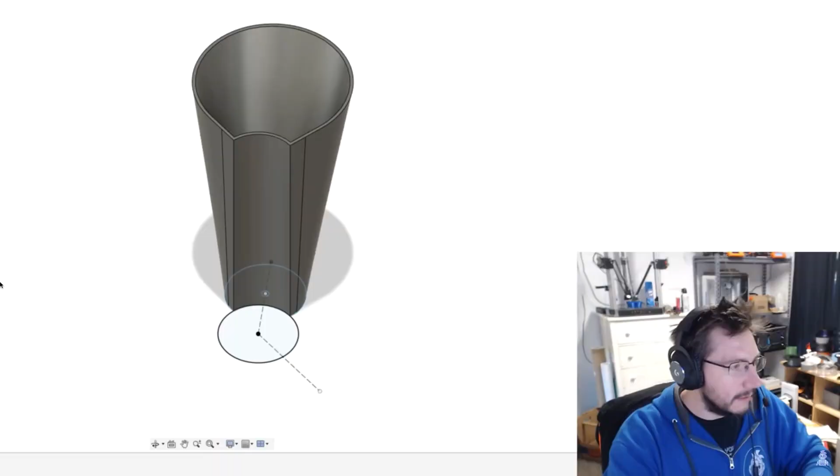The neat thing is it was a video I did like 2 years ago, and it's just neat to see how videos from years ago are still helping people, you know, solve their Fusion 360 problems. But anyway, so he followed my tutorial and was able to create this planter, and here's what he had to say about my channel.

This guy right here, Desktop Makes, 12.3K subscribers. That's obscene. This guy needs a lot more. And I went looking for ways to make holes in stuff in a circular pattern, and he showed me this really cool way via this video right here. Just a huge thanks to him for the inspiration.

And at the end of the video, Joel challenges his viewers that if they have a better or a different way of approaching this design, to go ahead and make a video and share it with him. Well, it's hard for me not to accept a Fusion 360 challenge, so let's do this.

Now I'm going to show you the approach I took in creating this design, but keep in mind there's always multiple ways to tackle a project, and the way I tackle a specific design can sometimes be dependent on the specific tools or techniques that I'm trying to teach, and sometimes it's just the direction that my mind chose to take at that time. And if I approach a design several times, sometimes I will just approach different paths.

Now there are times where you have to use the correct techniques, and there's a correct way and a wrong way of doing things. For example, setting proper constraints so that when you come back later to make a design change, the whole thing doesn't fall apart on you. But the path to reach a specific goal is usually one of many that you can take. But now let's clear him out of the way. Here's a quick look at the design we'll be making.

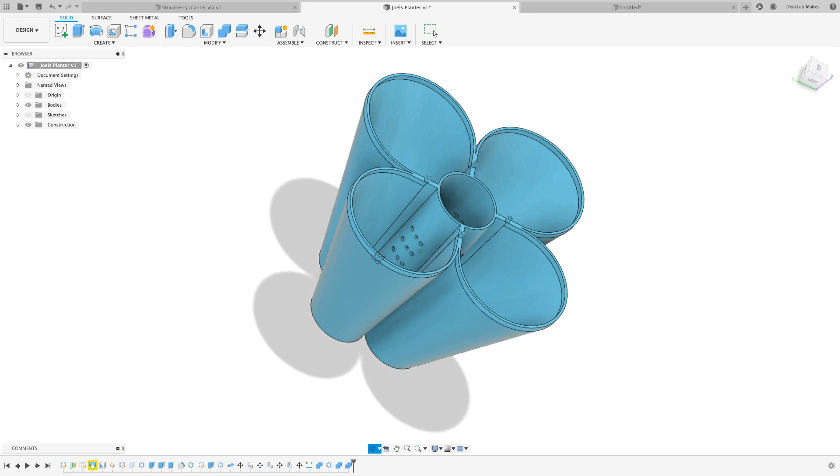Alright, let's go ahead and jump into Fusion 360. We'll begin by creating a sketch on our XY plane, and we're going to start with a circle. So we're going to go to Create, down to Circle, a Center Diameter Circle. We'll begin the circle right in our origin there. So we'll click once, drag out, and we're going to give this a diameter of 50 millimeters and enter.

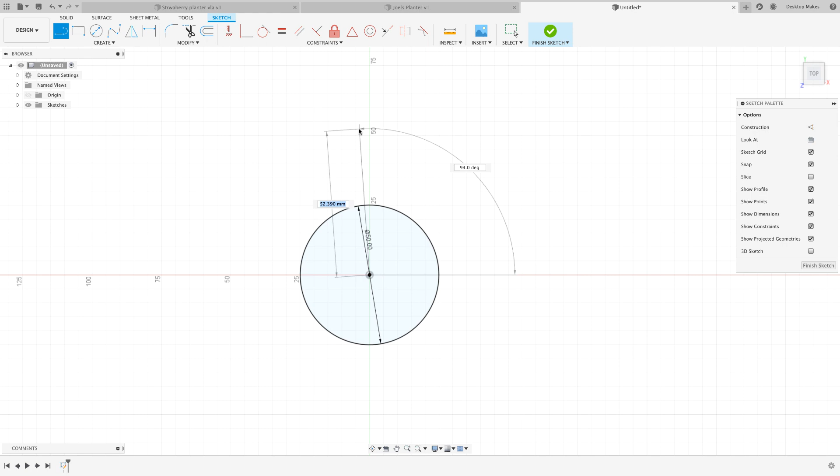Next, we're going to draw 2 lines, one going up and one going across. So we can go to Create, down to Line. Start at the origin, straight up. We're going to go 30 millimeters for that vertical line, making sure you get that vertical constraint there. And we're going to do the same thing. So I'm going to right click, repeat line, go across this time and enter 30 millimeters. Enter, and then we can see these are both 30 millimeters there.

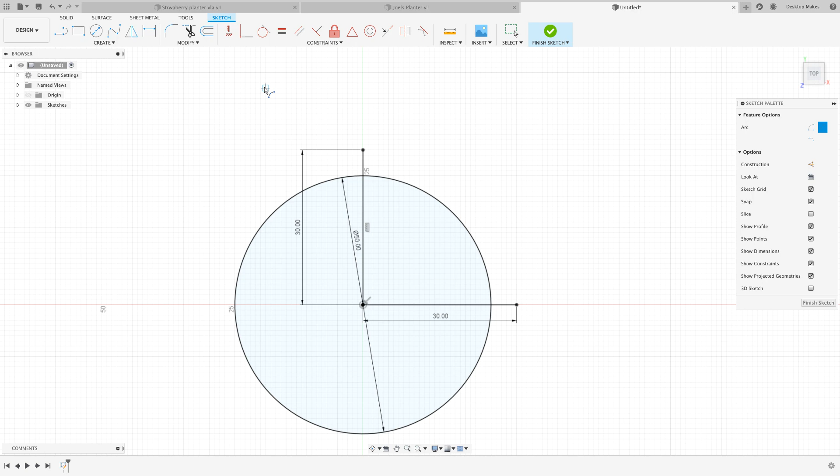Okay, next we're going to grab our arc tool, Create, down to Arc. We're going to go to 3-Point Arc. Start here at this point of our line, and our next point is going to be the other endpoint of our line here, the horizontal line. And then we're going to click anywhere out here. It doesn't matter where we click because we're going to come in and give it a dimension. So D for dimension, click on our arc, and we're going to give this a radius of 25 millimeters and hit enter. Okay, we're all set with this sketch.

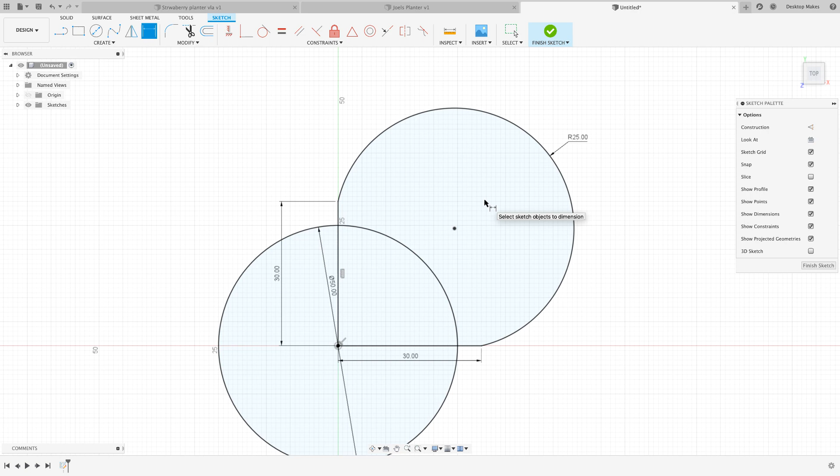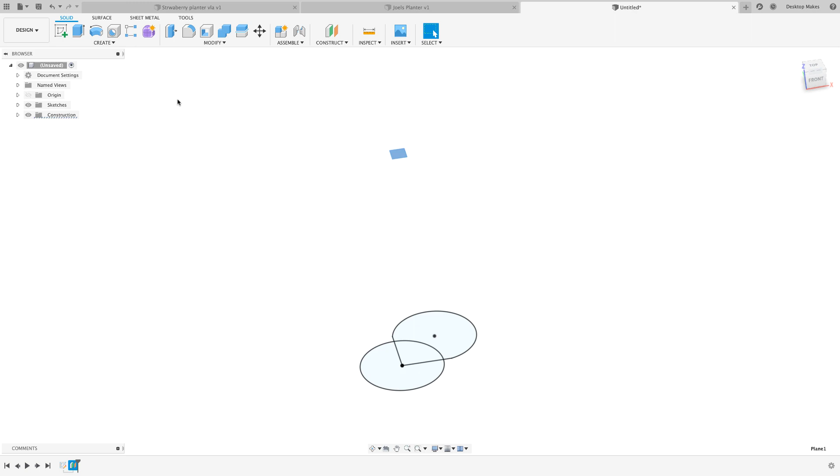We're going to click Finish Sketch, and then we're going to grab our offset plane here. So Construct, Offset Plane. We're going to grab our XY plane as a reference, and we're going to take that arrow, go straight up. We're just going to type 150 millimeters because we're going to offset this plane to be 150 millimeters from the bottom. Here's that plane, and so we're going to go ahead and create a sketch right on top of that plane.

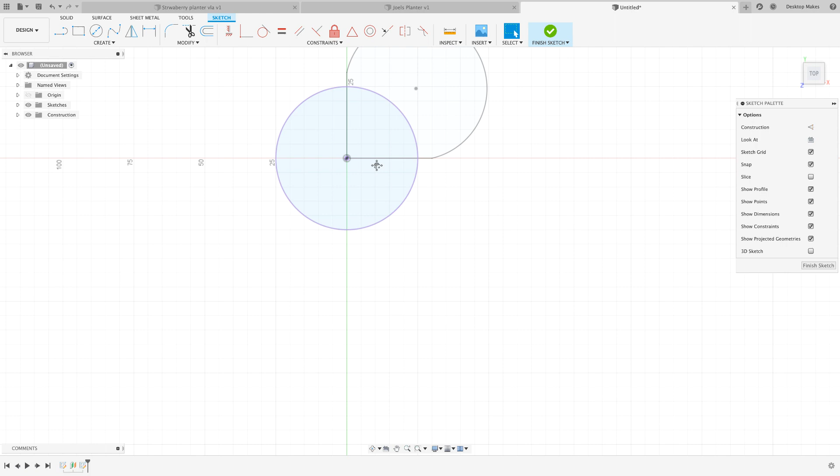All right, now what we can do is we can project this circle here into this current sketch by hitting P for project. Selection filter, we're going to go with specified entities, making sure projection link is checked. We're going to click on that circle and then click OK. And notice it comes into this sketch now. So this is our original sketch. This is our current sketch up here, 150 millimeters from the bottom. And notice it comes in purple, so it's linked to that first sketch.

Okay, next we're going to do a similar thing. L for line, which is a shortcut for our line tool. We're going to start it at the origin, go straight up. This time we're going to give it a distance of 60 millimeters and do the same thing going across with 60 millimeters. Again, making sure you get these constraints on here.

Okay, next we're going to grab our arc tool. So create arc, 3-point arc, do the same thing, this endpoint and then this other endpoint, and we're going to click anywhere. D for dimension. So we'll go with double the radius of our last circle, which was diameter of 50, so radius of 25, which means this is going to be a radius of 50, giving us a diameter of 100. Okay, so that's it. We're going to click on Finish Sketch.

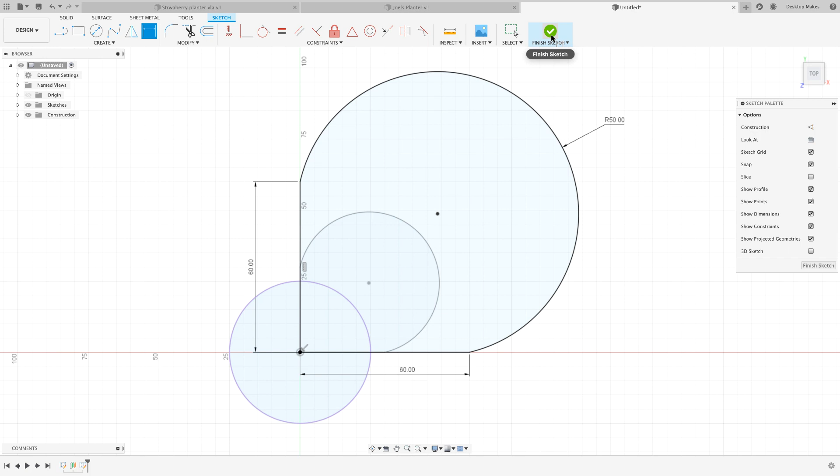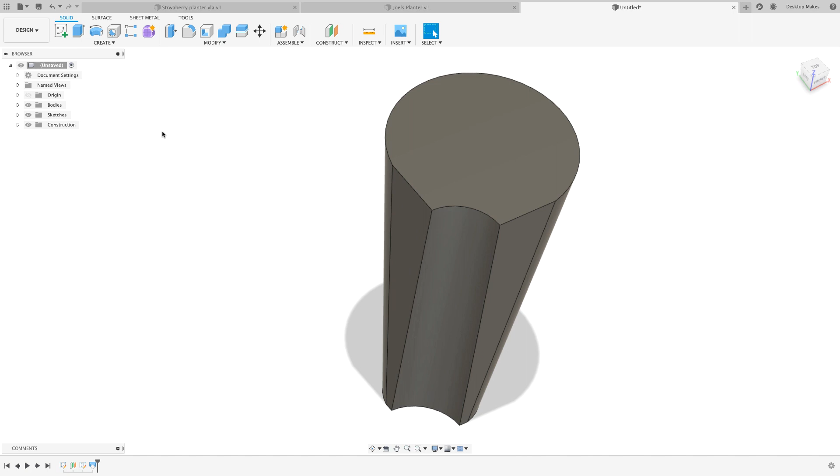Basically, we have two similar sketches, one on our XY plane, another one on a plane 150 millimeters away. And next, we're going to grab our loft tool. So create down to loft, and we're going to loft this profile to this profile up here. Click OK, and now we have this 3D shape. And we're going to shell this by going to Modify, down to Shell. Select the top surface. We're going to give it a 2 millimeter shell and click OK. Now we see the whole inside was shelled and we have just this outer shell wall.

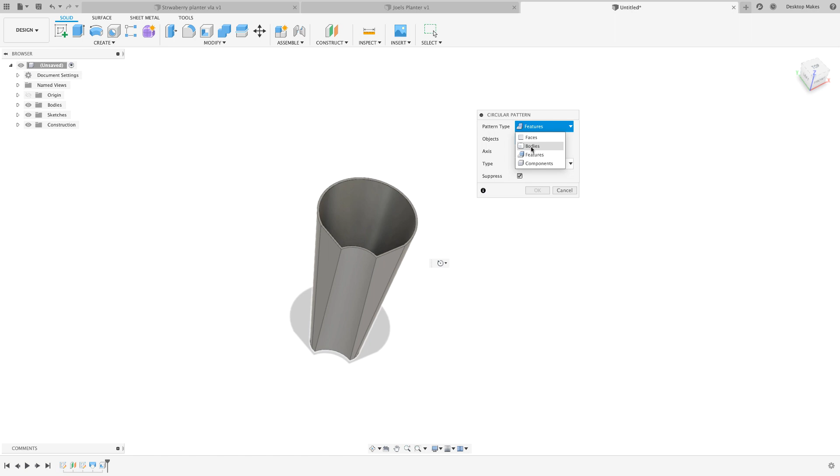Okay, well now we're going to do a circular pattern of this. So we'll go to Create, down to Pattern and Circular Pattern. We want to create 4 of these. So for pattern type, we're going to go with bodies. We're going to select this body. Axis here, we're going to choose our Z axis there. And we can see it defaults to 3. We're going to increase that by 1 to make it 4. Click OK. And there is our 4 planters. Notice here we have under bodies, there's 4 different bodies.

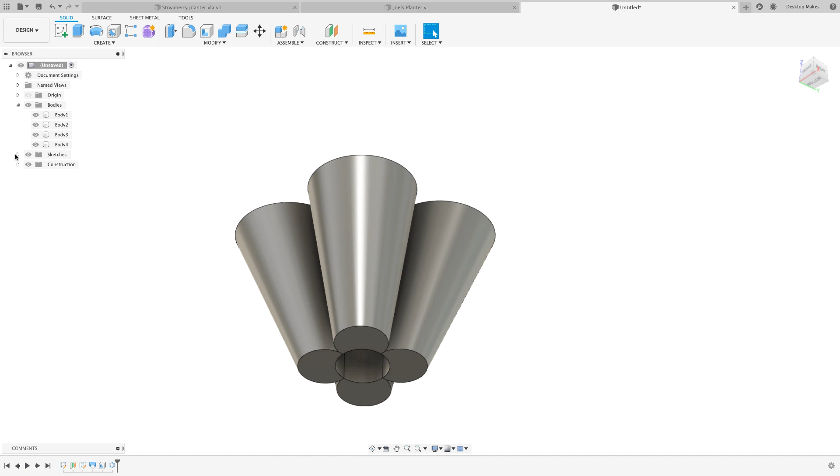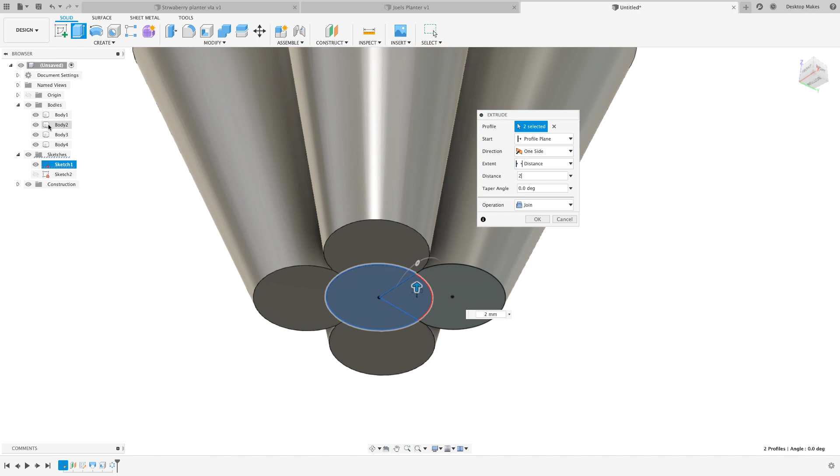We're going to go to the bottom here and bring in that original sketch. We're going to turn that on by toggling the visibility there. E for extrude, select both of these profiles so we get the whole circle selected. So you get this like Pac-Man shape, and make sure you get the little pizza slice here. And we're going to give this a distance of 2 millimeters. That's going to extrude up 2 millimeters. But notice what happens because the operation is join. It's going to join all of these 4 bodies into one. So if I click OK, keep your eye here, all those go into one. So now I have one body that I can toggle on and off.

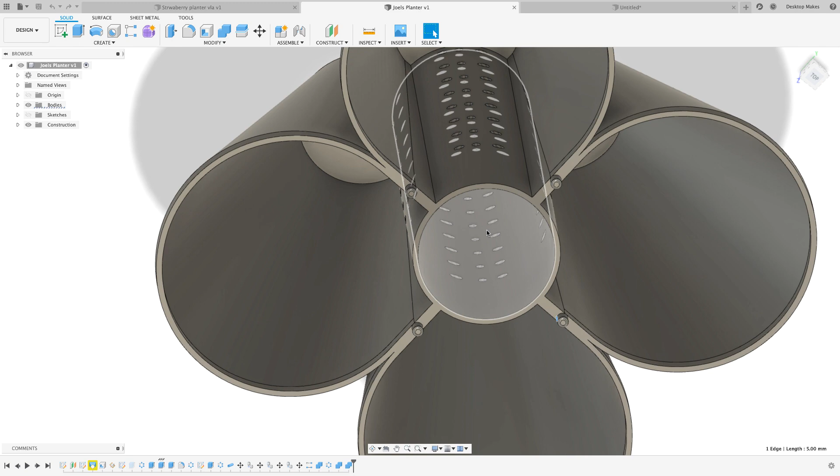Okay, let's take a look at what we have so far. We made that one loft, turned it into 4 different little planter bodies here, combined them into one. And the next thing we're going to do, if I go back to Joel's planter here, we see that there's these drainage holes here from the center so that you can water the center part and then the water can go out to each individual planter. So let's go ahead and create that.

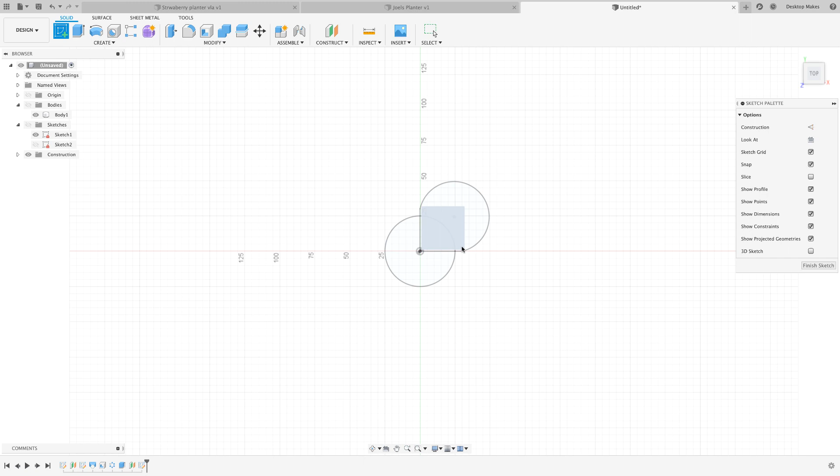I'm going to create an offset plane here off from the bottom plane. So let's untoggle body so I can select this. I'm just going to make that 5 millimeters from the bottom and then click OK. And now we can create a sketch right on that plane that we just created. And let's bring in body so we can see how this looks. So what I want to do is create these holes here to go into each one of these planters. So the way I'm going to do that is I'm going to do the same approach Joel did with the pipe tool, but I'm going to show you sort of a different way to approach it.

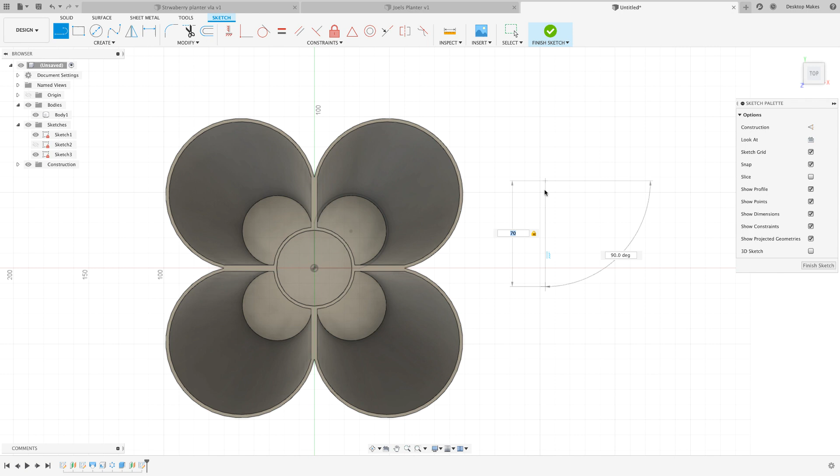I'm just going to create a line here. I'm going to draw a line and it's going to be 70 millimeters here. And the angle really doesn't matter. I'm just going to give it like going from the top to like bottom right. Okay. And next I'm going to grab my constraint tool, my midpoint constraint. When you get used to using your constraints, it makes your design go so much smoother and efficient.

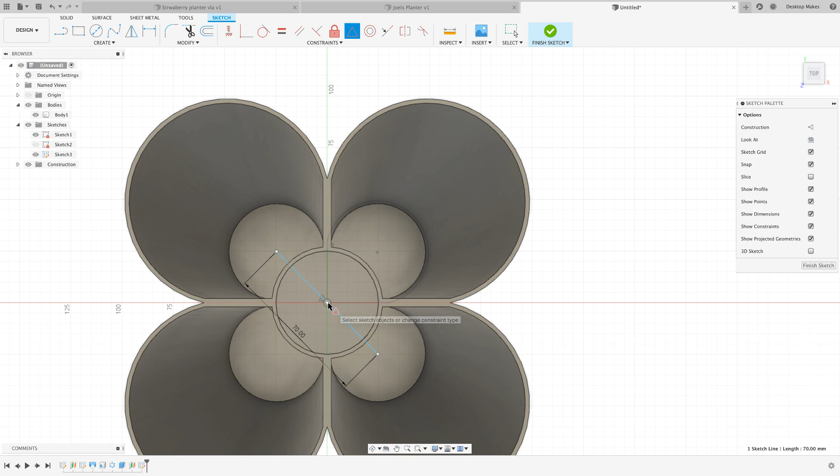I want this line to be centered right where this midpoint is here. So all I have to do is grab that midpoint constraint, click on the line, click on the center point, and it puts that line right in the middle, evenly spaces it between this point here.

Okay, I'm going to do the same thing. I'm going to grab another line. I'm going to have it go the other direction, 70 millimeters. Click OK. Midpoint constraint, grab my line, click on that midpoint, and it centers it right on that point.

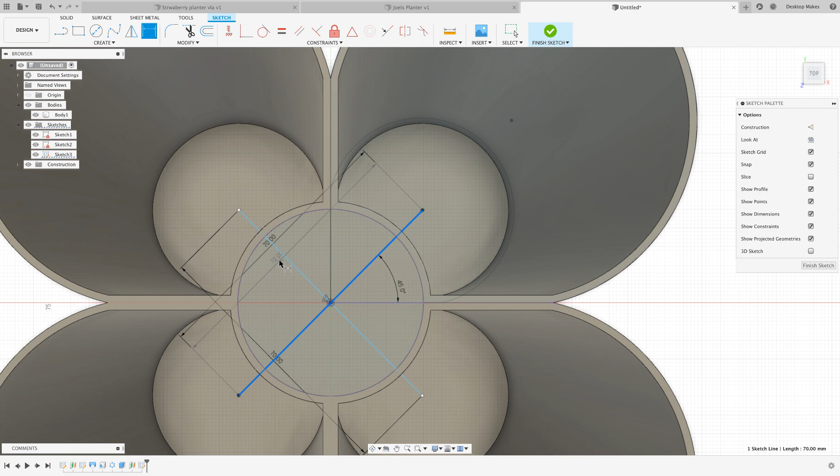Okay, next let's bring in the sketch 2 because I want to reference this line here. So what I'm going to do is D for dimension and dimension this line here from that center line going across and give that a dimension of 45 degrees. And then, let's hit escape first, and then I'll hit D for dimension again, and I'm going to put an angle between these 2 lines here, right there.

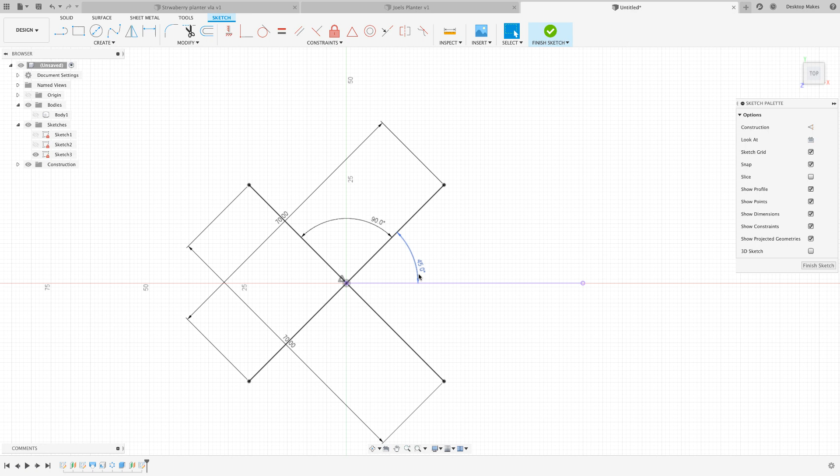So I have my 2 lines. I'm going to go ahead and make that 90 degrees, hit enter, and now I have this line being 45 degrees from here, and then these 2 lines 90 degrees from each other. Let's untoggle body so we can see that a little clearer here, and these other sketches just to show you exactly what I have there. This X pattern here, 45 degrees, so that it goes right into that planter, and each one goes into their individual planters.

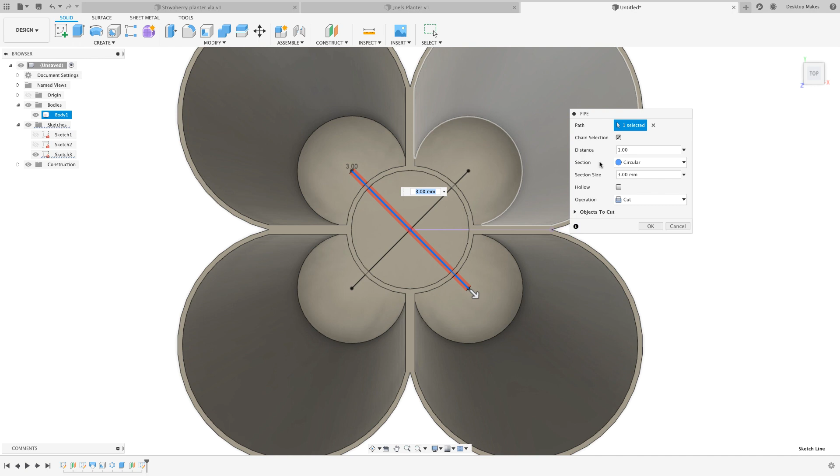Okay, finish sketch. We're going to go to create and then down to pipe. We're going to need to bring that sketch into view, and we see our lines there. So I'm going to select the line, 3 millimeters for our section size, section circular, and operation is cut. I'm going to click OK, right click, repeat pipe.

Let's bring that sketch back into view. We're going to do the same thing with the other line here. Click OK. And now if I go in, you can see I have this hole here that was created because I used that pipe command to cut these holes.

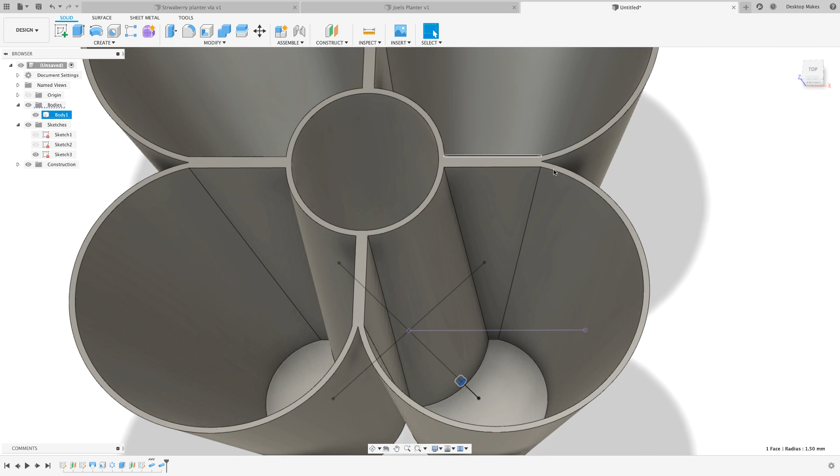This is also a good time to take advantage of our section analysis. So we'll go to inspect, down to section analysis. We can select really any one of these planes here. I'll just select this ZX plane here, and then I can take this arrow, move it out or in. It lets me see inside my part. So if I, let's say, move it about right here, click OK.

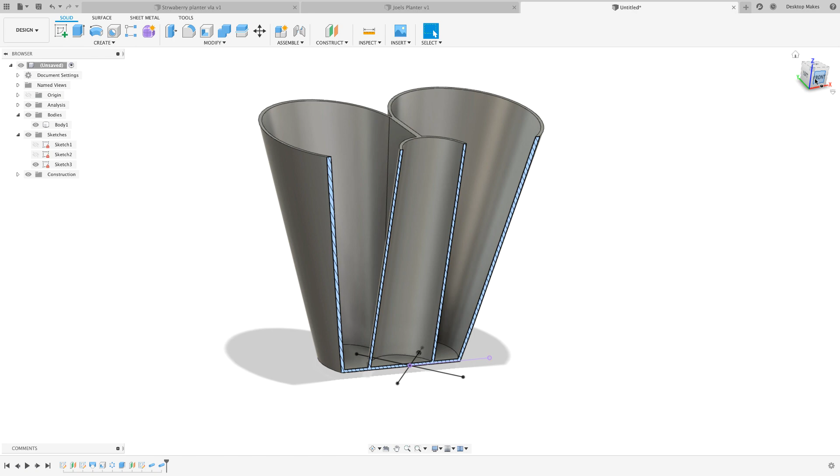And let's go to that front view, untoggle sketches, and we can see we have one hole here. So I'm cutting my part in half here so I can see through it. A hole here going into that planter and a hole here going into this planter.

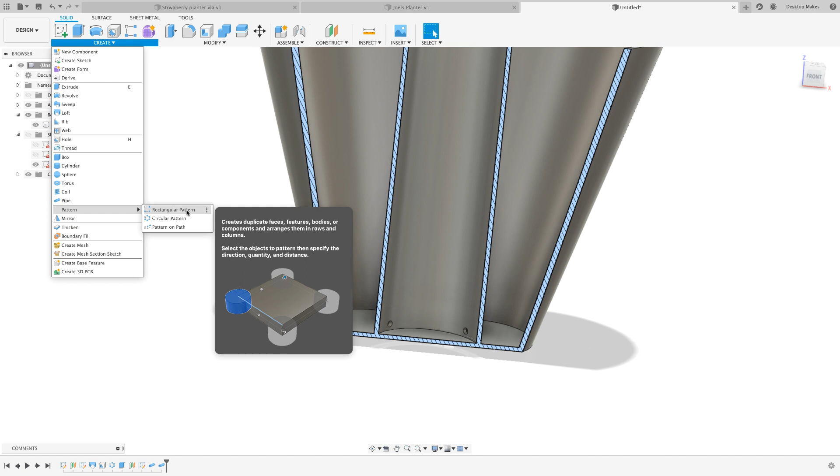Okay, next we're going to create a rectangular pattern to go up, to create a pattern of that hole. So we'll go to create, down to pattern, down to rectangular pattern here, and we'll get our little dialog box here. Our pattern type, we'll go with features. That way we can select it right from our timeline. So for objects, we're going to select these two pipe features that we did.

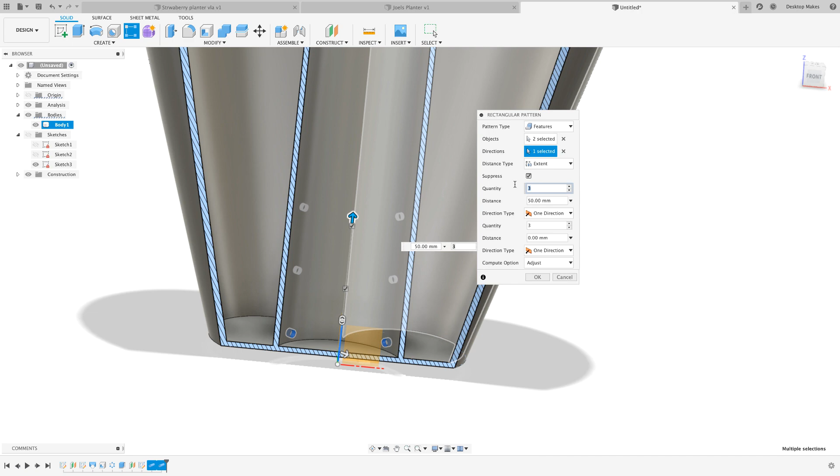And for direction, we're going to want to go straight up. So we can just choose our Z axis here. Take that arrow and just start dragging it up. Quantity, we'll do 8. And let's zoom out a little bit, and then we're gonna do a distance. So distance, let's say 120 millimeters, and you can see that takes those holes and goes straight up 120 millimeters, and we can click OK, and now we can see we've patterned those holes up.

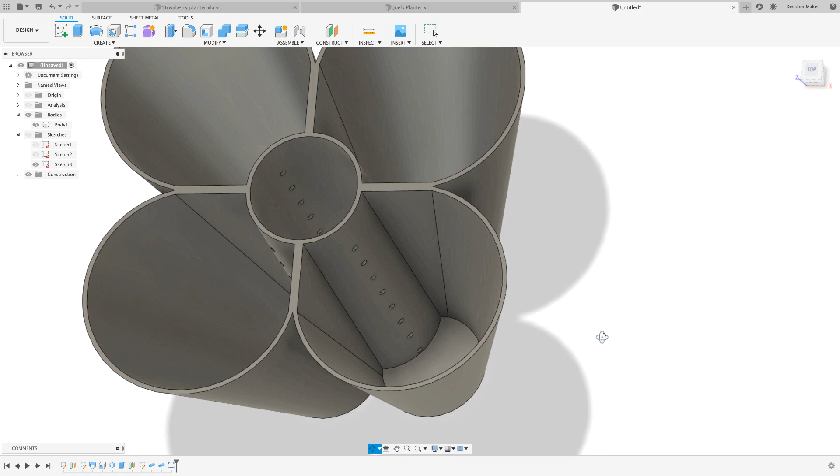Let's untoggle that section analysis so we can see the whole thing, and we can see it's on each side. Now in Joel's planter, he made 3 of these and went up, but you can see how you can change the number by just simply going back to that sketch. Basically all you would have to do is right click on your timeline or double click to enter that sketch and just enter more lines and create more pipes, give them their angles, and then you can easily create more holes.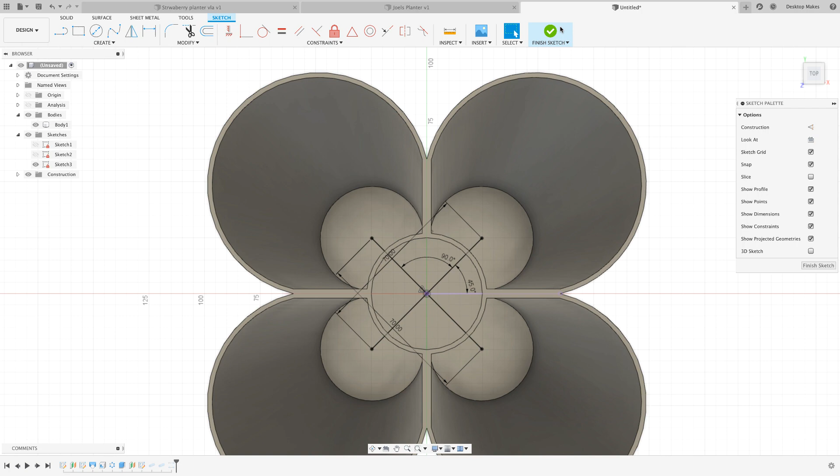Okay, Joel also extruded this straight up because he wanted it to go up straight to have sort of a top little edge to it. So we're gonna select that profile, E for extrude. We'll enter 5 millimeters, and this will extrude it straight up.

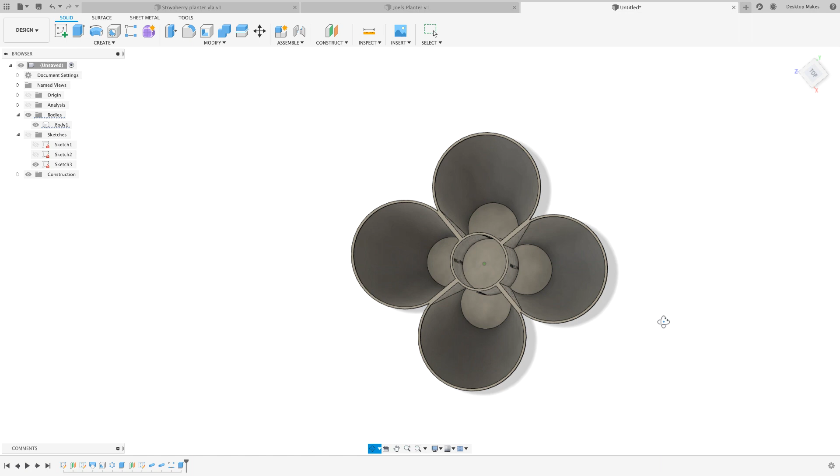Okay, next what we're going to do is we need to put some holes on the bottom, some drainage holes. So we'll create a sketch on the bottom surface here, and let's zoom in, and let's project the outline here of that base.

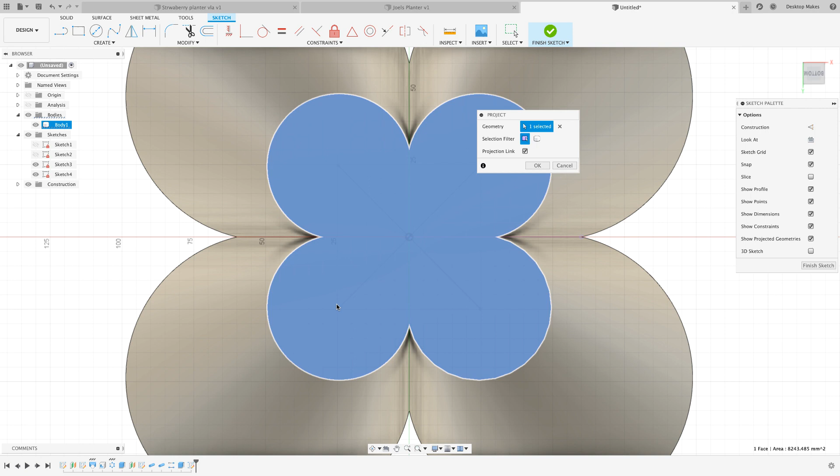So P for project, we're going to go with specified entities, projection link checked, select the center here of that profile so that the whole thing highlights blue, click OK. Now we'll untoggle body so we just see this reference here. So I have that sketch 4 and my sketch 3 on. Actually, we don't need to see sketch 3. Let's untoggle that and we just get this outline with the center for these holes here.

Okay, C for circle, we're gonna create a circle down here somewhere, 5 millimeters for diameter, and we're gonna vertically constrain this circle to this point. So now it lines it up straight. Let me do that again so you can see exactly what that does a little bit better. Move it to the side here and vertically constrain it. So when I click the circle, click on the center point, it brings it up so it's lined up. I can move it up and down, but I can't move it left to right because it wants it lined up with this point.

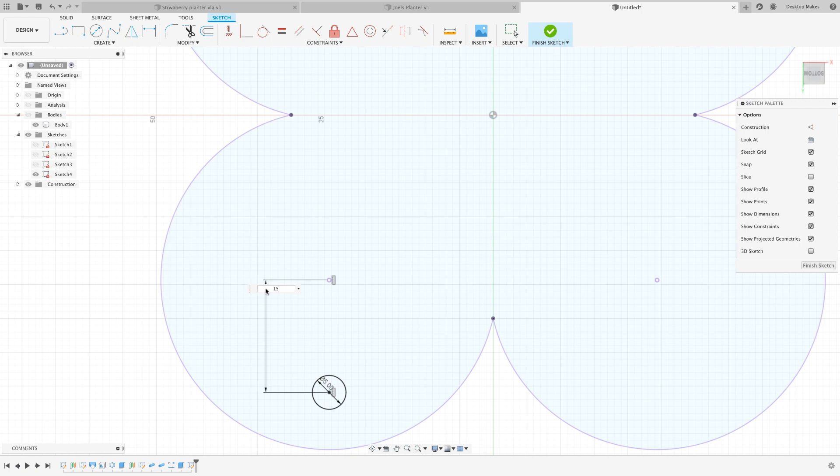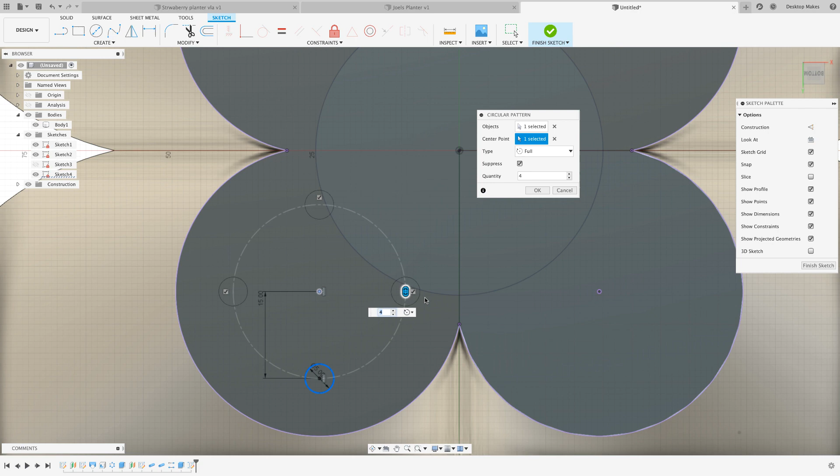Now escape, D for dimension, and I'm going to dimension this circle from this point at 15 millimeters. And next we're going to do a circular pattern of that circle. So create, down to circular pattern. Select the circle and select the center point as this point here. Now watch what happens here. I'm going to turn on body so we can see how this relates to our model here. So I can increase these numbers here. Let's also turn on sketch 2, because we see that circle here. If I go with 4, the circle will sort of overlap that center cylinder there, which I don't want.

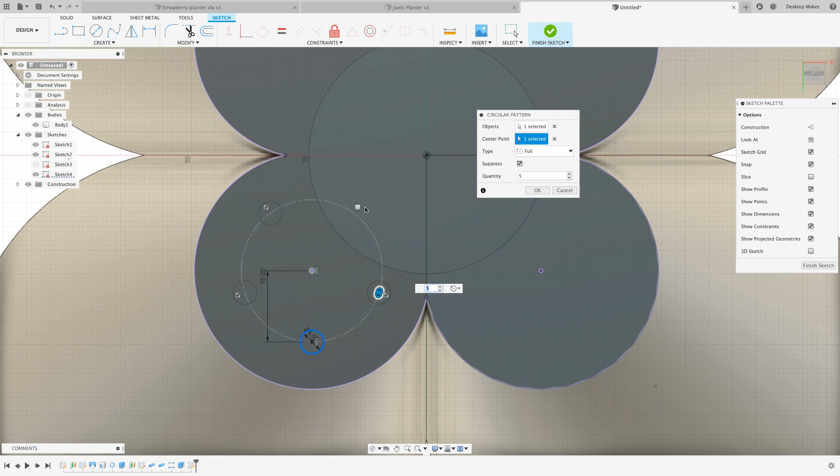But let me show you a trick of what we can do. I'm gonna make 5 of these. So I've got 1, 2, 3, 4, and then one of them goes into that center cylinder, which I don't want. So I can just uncheck this little check mark here, and that will suppress that individual circle. So you don't have to go with exactly the numbers of circles that you choose. You can choose how many and then uncheck if you have, for example, a specific pattern you want, but there's a couple that you don't want because they get in the way of your design or you just don't want them. Okay, so we're going to suppress that one, click OK, and now we have our 4 holes here.

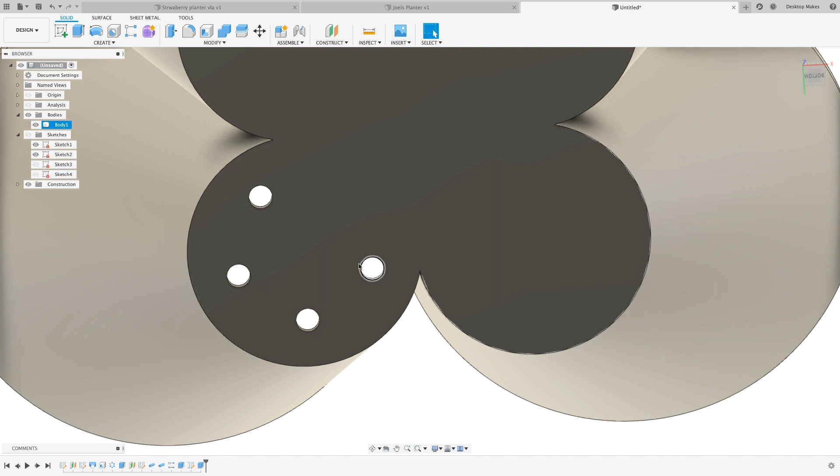E for extrude, we're going to need to bring in that sketch. Select these 4 profiles, and we're gonna go ahead and extrude these up. So I'm gonna drag that arrow up. Distance, I'm gonna go with all, and then click OK. And then there's our hole there. And now we're gonna do a circular pattern. So what we just did was a circular pattern within our sketch environment. Now we're going to do a circular pattern within the modeling environment, the 3D environment. So one was in the 2D environment. Now we're going to do it in the 3D environment.

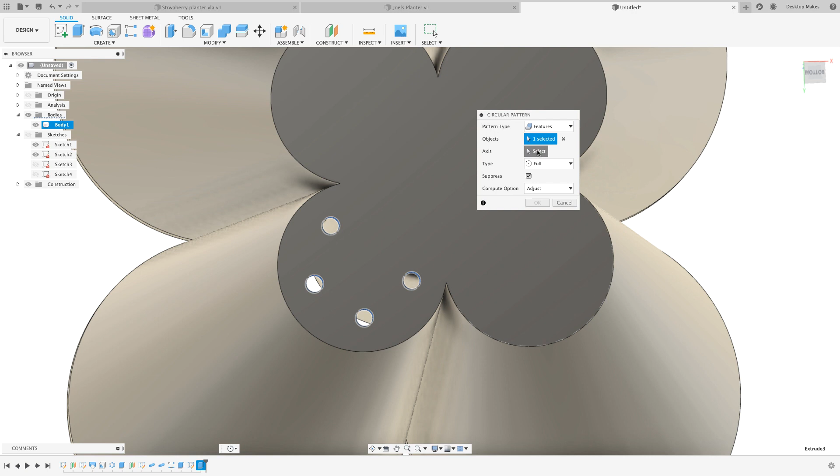So we'll go to create, down to pattern, circular pattern, and we're going to select features here as our pattern type. And we can just select this extrusion feature on our timeline. And that's going to select all of these 4 individual circles that were extruded. Axis, we'll click on that. We're going to go with our Z axis there. So let's untoggle body so we can select it a little better there. Bring bodies back on. And let's go back to a bottom view here.

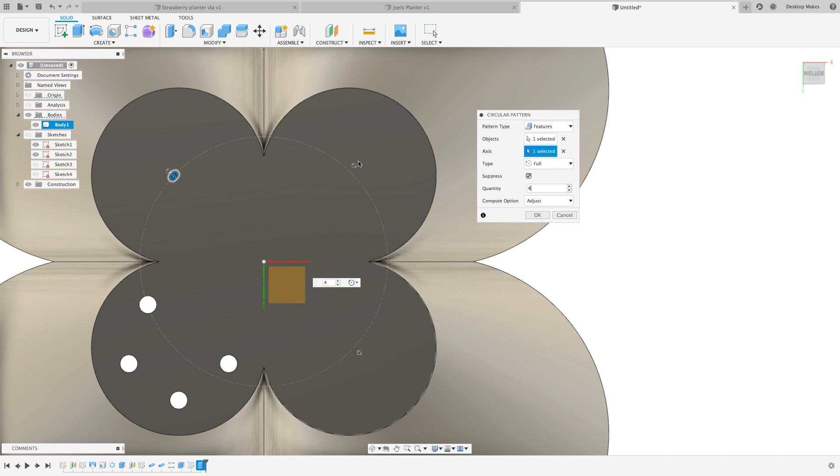And we can see we can now increase the quantity here. So we're going to go with 4. And you see a check mark here for each of where it's going to go. Click OK. And now we see our pattern of those 4 circles around that center axis. And you can go back, you can change these to however many you want. Go back to that sketch, change how you want those circles laid out. But okay, that's basically the design in a nutshell there.